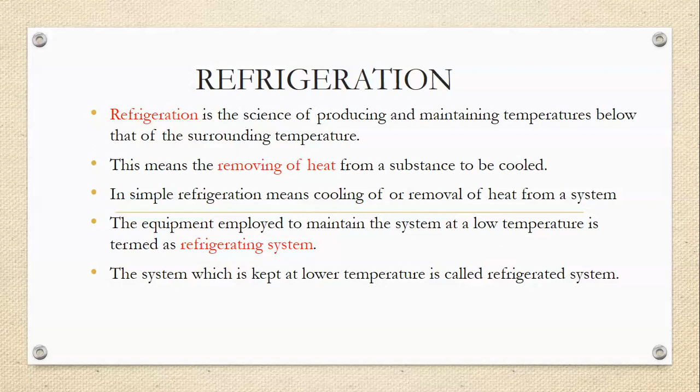So in this refrigeration, we are removing heat from a substance to be cooled. So in simple, we can say that cooling or removal of heat from the system. So the equipment employed to maintain the system at a low temperature is termed as refrigerating system. The system which is kept at low temperature is called refrigerated system.

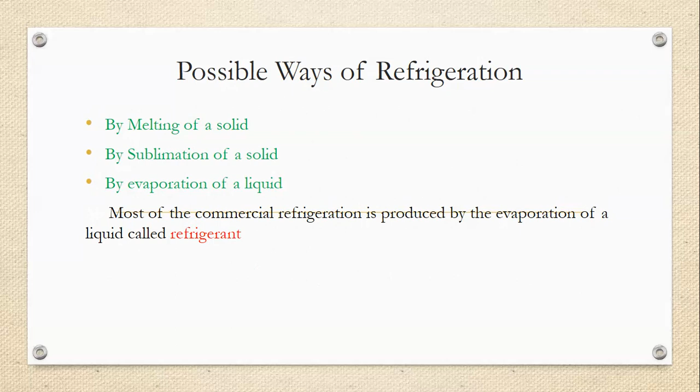Next we shall see what are the possible ways of refrigeration. So there are three possible ways. One is by melting of a solid. Next is by sublimation of solid. And the third is by evaporation of a liquid. So most of the commercial refrigeration is produced by the evaporation of a liquid called refrigerant.

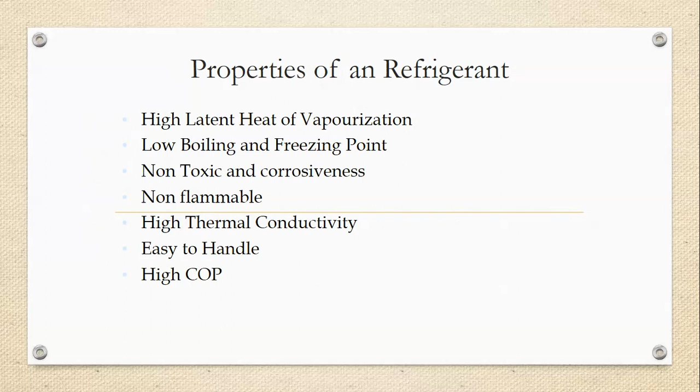So what are the characteristics of a refrigerant? The first characteristic is high latent heat of vaporization, low boiling point and freezing point, non-toxic and non-corrosive, non-flammable, high thermal conductivity, easy to handle, and high COP. So what are the commonly used refrigerants? Air, ammonia, carbon dioxide, sulfur dioxide, Freon 12, methyl chloride, methylene chloride.

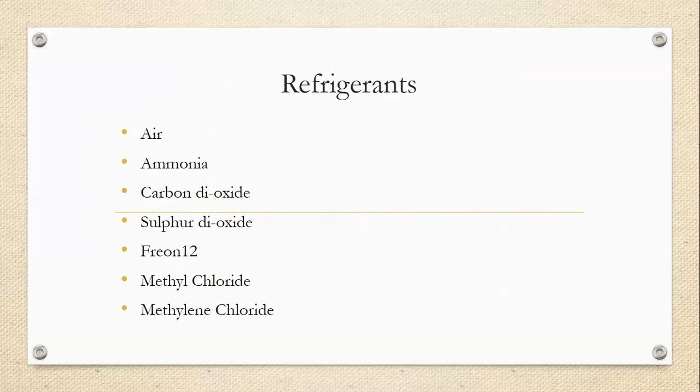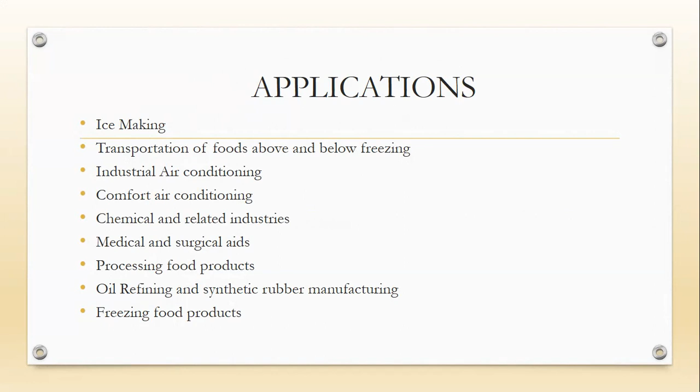Next, what are the applications of refrigeration? So the major applications are ice making, transportation of foods above and below freezing, industrial air conditioning, comfort air conditioning, chemical and related industries, medical and surgical aids, processing food products, oil refining, synthetic rubber manufacturing, and freezing of food products.

So next we shall see what are the types of refrigeration systems. There are mainly four types of refrigeration system. One is ice refrigeration. In this refrigeration, we cool the space by means of having ice in a cabinet. Next system is air refrigeration system. In this air refrigeration system, air refrigerant is used. On expansion of air, it absorbs heat from the system, and on compression of the air, the refrigerant gets cooled.

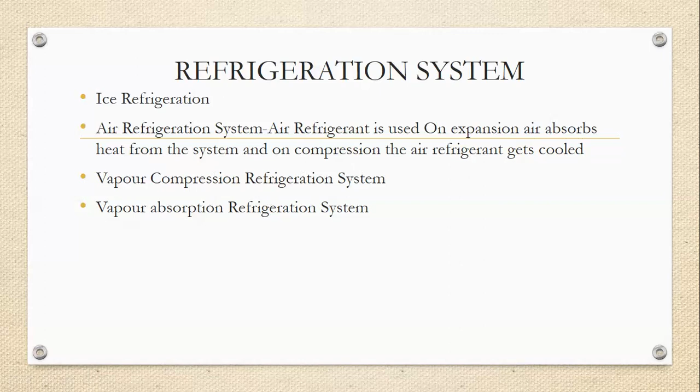So first there is a compressor. The compressor compresses the low pressure vapor refrigerant into a high pressure, high temperature vapor refrigerant. After the compressor, the refrigerant enters into the condenser. While coming inside the condenser, the refrigerant is at high temperature and high pressure. In this condenser, the heat exchange takes place, the refrigerant gets cooled and the phase change occurs. Only the phase change occurs. The phase change will be from vapor to liquid.

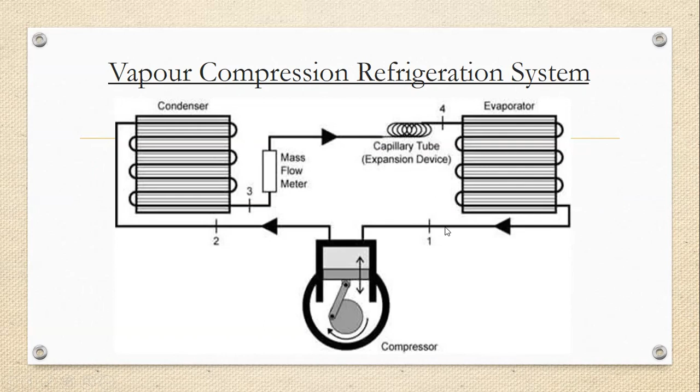In the evaporator, the low temperature, low pressure refrigerant gets heated, and it absorbs heat from the confined space or from the refrigerator. The purpose of the refrigerator is to maintain the low temperature inside the confined space. So heat has to be removed, and that heat gets absorbed in the evaporator. In this evaporator, the refrigerant phase change happens from liquid to vapor. After the evaporator, the refrigerant again enters into the compressor as low temperature, low pressure vapor, and the cycle repeats.

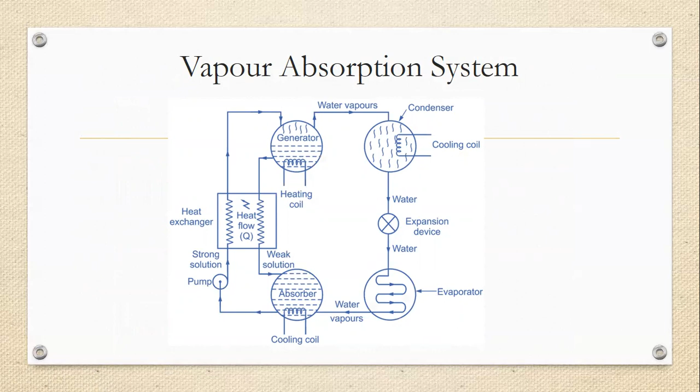So the next type of refrigeration system is vapor absorption refrigeration system. In this system, the parts are evaporator, absorber, generator, condenser, receiver, expansion valve, pump. As we all know, the evaporator absorbs heat. So what is an absorber? In this, we are using water as an absorbent. And what is the generator? In this generator, we have water as well as the refrigerant, ammonia.

And the condenser is the same as that of VCS. In the condenser, the phase change will happen from vapor to liquid. In the receiver, the high pressure liquid gets stored. And next is the expansion valve. In the expansion valve, the expansion process takes place, which reduces the pressure of the refrigerant.

And in this vapor absorption system, we use a pump. So we will pump the liquid at a high pressure. So in this vapor absorption system, the new thing is the absorber and the generator. So in this generator, we use ammonium solution, and in the absorber, we use water. So about the solubility of ammonia: at low temperature and higher pressure, its solubility is high.

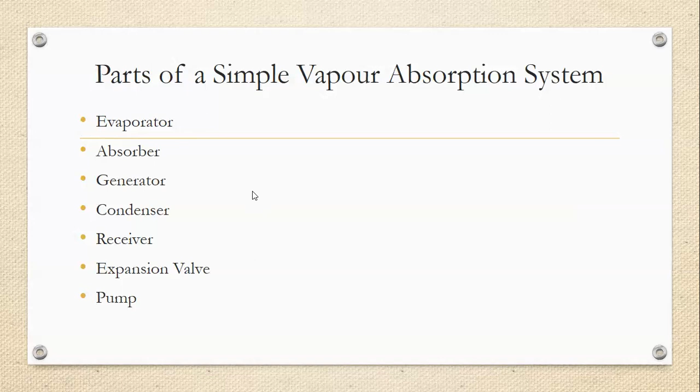In this simple vapor absorption system, the work done on compression is very, very less than that of the vapor compression cycle. Also, the leakage of refrigerant is very less, but the charging of refrigerant is very, very difficult in the vapor absorption system.

Next, we shall compare the vapor compression system with the vapor absorption system based on type of energy. In vapor compression system, we use a high grade energy, and in vapor absorption system, we use a low grade energy. And the energy supply is low in vapor compression system and high in vapor absorption system. And the wear and tear is more in vapor compression system than the vapor absorption system.

So next one is the suitability. So vapor compression system is much more suitable than the vapor absorption system. And next, about the charging of refrigerant. So charging of refrigerant in vapor compression system is much easier than in the vapor absorption system.

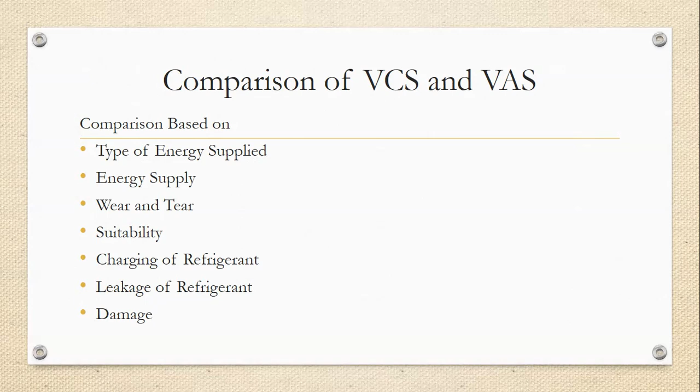And about the leakage of refrigerant, there are more chances of leakage in vapor compression system than the vapor absorption system. And about the damage, in the vapor compression system, liquid traces in the suction line may damage the compressor. So there is more possibility of damaging the compressor in the vapor compression system than the vapor absorption system.

The next thing to explain is the air conditioning system. So it is similar to that of a refrigeration system. So what is air conditioning? Air conditioning is a process of conditioning the air according to human comfort, irrespective of external conditions. So in this, we are controlling the temperature, humidity, motion, and purity of air in the confined space. So in this also, we are maintaining the temperature of the air of the system below the surrounding temperature.

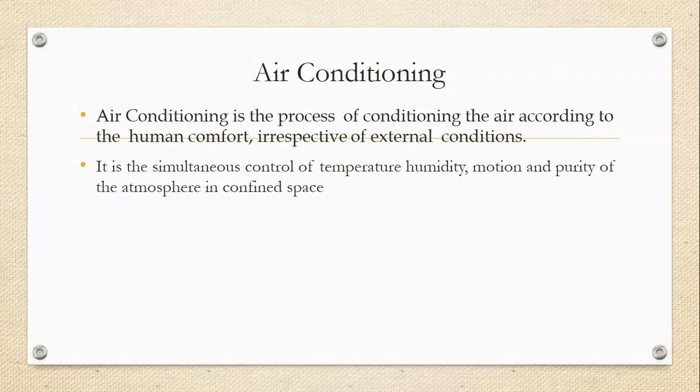So what are the basic elements in an air conditioning system? The basic elements are fans, filters, refrigerating plant, means for heating, means of humidification and dehumidification, and control system. So let us explain one by one. So what is the use of a fan? Fan is used for moving the air. So the flow of air is produced by means of fans. The next thing is filters. Filters are used for cleaning the air.

So the next thing in the air conditioning system is the refrigerating plant. The refrigerating plant is connected to a heat exchange surface such as finned coils or chilled water sprays. So the next thing is the means for heating. So the air is heated by hot water or steam heated coils.

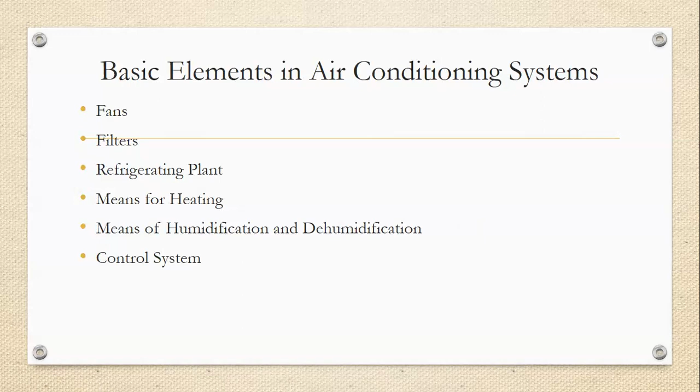The next thing is means of humidification and dehumidification. In humidification, we increase the humidity of the air by having more water vapor content. And in dehumidification, we are removing the water vapor present in the air. The next thing is the control system. The control system is mainly used to regulate the amount of cooling or warming of air by using control devices like sensors.

So what are the types of air conditioning systems used nowadays? There are 6 air conditioning systems, shown in the figure: central air conditioner, portable air conditioner, cassette air conditioner, split air conditioner, window air conditioner, and floor mounted air conditioner. For domestic purposes, we all know that we use window air conditioners and split air conditioners. In industries, we use central air conditioning units, cassette air conditioning units, and floor mounted air conditioning units. For the portable type, we have a portable air conditioner.

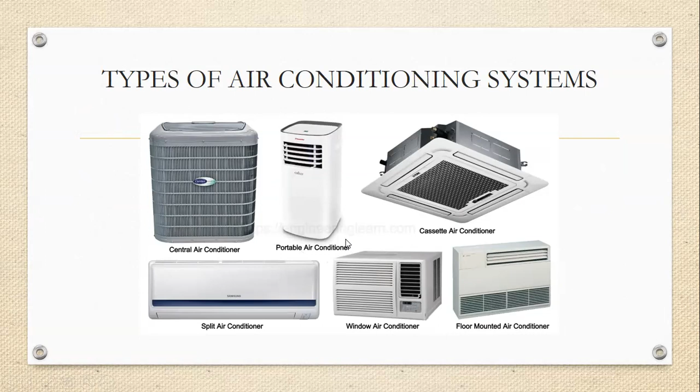Conclusion. Without the advent of refrigerators, the unreliable methods of storing food would not only cause problems for taste but also health, even without rotting. The methods to preserve some foods required the use of chemicals that were particularly hazardous over time. Refrigeration eliminated much of this, and as a result, it had a major impact on the economy.